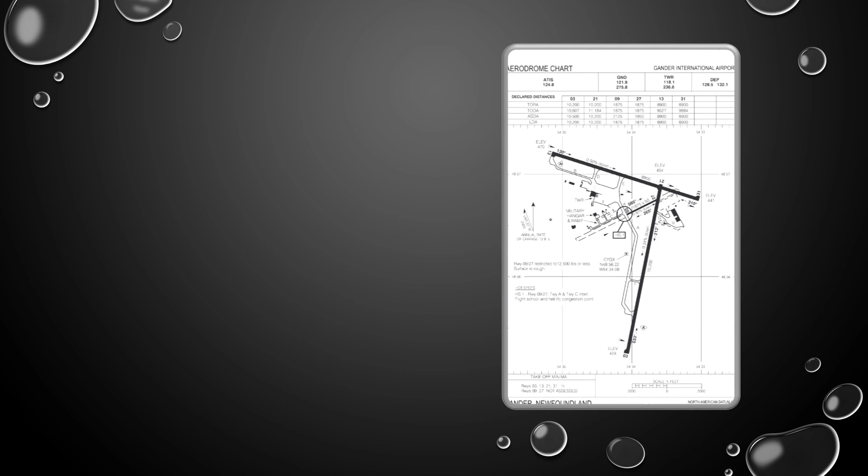Now here's a diagram of Gander International Airport. But what exactly happened in Gander? They had a successful refueling, then they taxied via Delta, runway 13 to runway 21. Runway 21 is 10,200 feet long and has a downslope gradient of about 0.34%, which should have aided them in their takeoff roll. About 51 seconds after brake release, the pilot rotated at 167 knots.

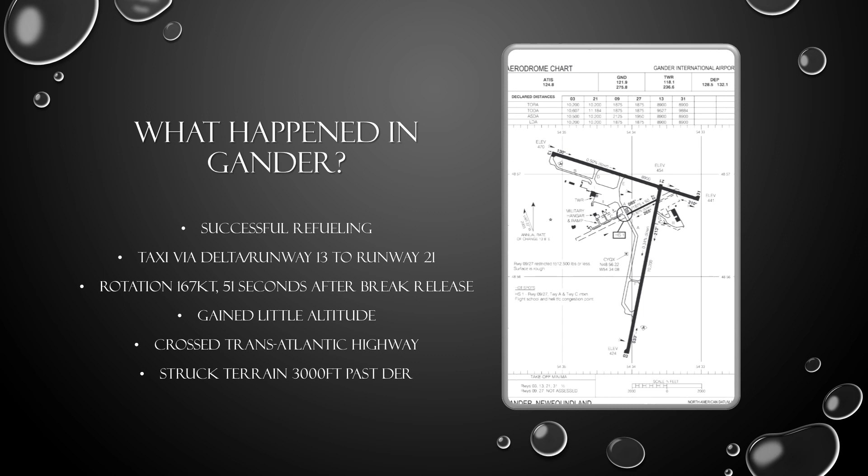So why did this happen? The investigation was done by the Canadian Aviation Safety Board, or the CASB. According to the CASB, ice contamination on the leading edge and upper surface of the wings was the leading cause of the accident. This is well explained by the time of year and the geographical location of Gander. There's plenty of water for moisture, and the cold temperatures are due to the location and the time of year. Also, human error plays a significant role in most aviation accidents.

So how does ice contamination affect a plane's ability to fly? When the wing of an aircraft experiences an accumulation of supercooled water droplets, it changes the surface of the wing, or the wing camber. This dramatically increases the drag and the weight of the aircraft, which in turn reduces lift, making an aircraft moving at the rotating minimum stall at the end of the runway. And as you can see here, an accumulation of ice on both the wings and the body of the aircraft increases the weight and increases the drag. Therefore, you need more lift and more thrust just to keep the plane in the air.

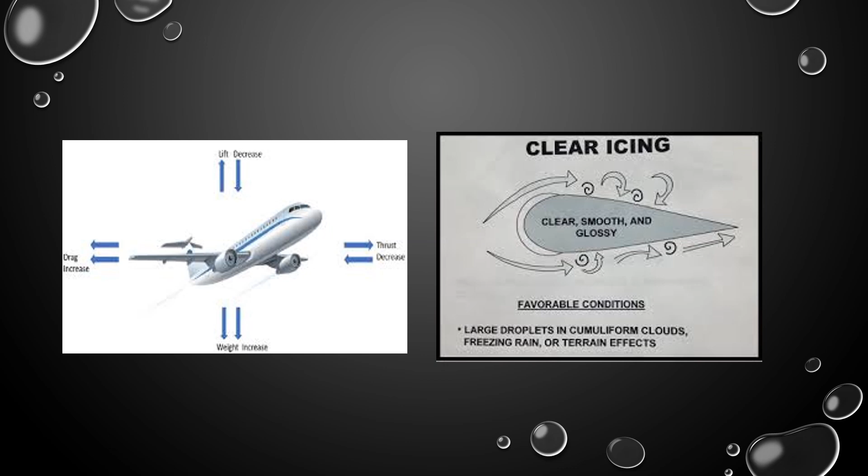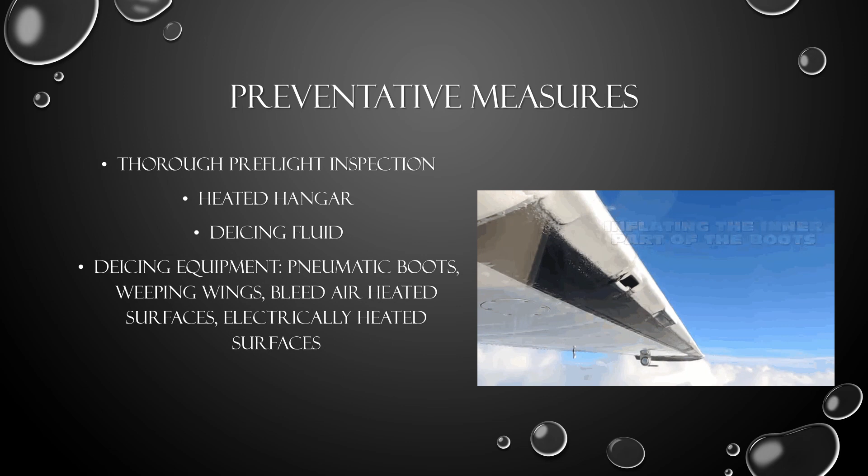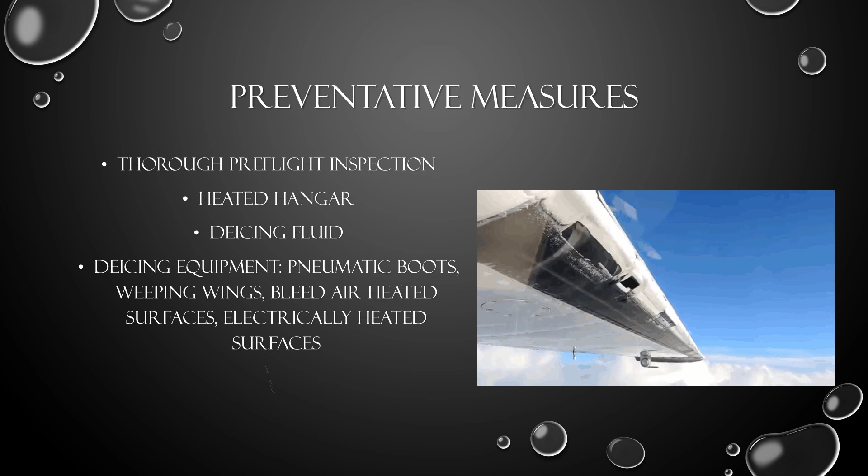Preventative measures. A thorough pre-flight inspection is the first and primary protection against icing hazards. Not only are we looking for structural hazards that can cause in-flight failure, but also an accumulation of frost or ice. Keeping your plane in a heated hangar protects it from precipitation and will melt any ice that may have formed. De-icing fluid and other equipment such as pneumatic boots, weeping wings, bleed air heated surfaces, or electrically heated surfaces also help remove any accumulation of condensation particles. If all else fails, the pilot in command has the right to deem the conditions unsafe and delay the flight.

Reason's Swiss cheese model. This is a model of accident causation proposed by James Reason. It stated that most accidents can be traced to one or more levels of failure: organizational influences, unsafe supervision, preconditions for unsafe acts, and the unsafe acts themselves. The slices of cheese represent an organization's defenses against failure as a series of barriers. The holes in the cheese represent individual weaknesses in parts of the defense system. When all of the holes in the cheese align correctly, this permits a trajectory of accident opportunity, which may lead to an accident.

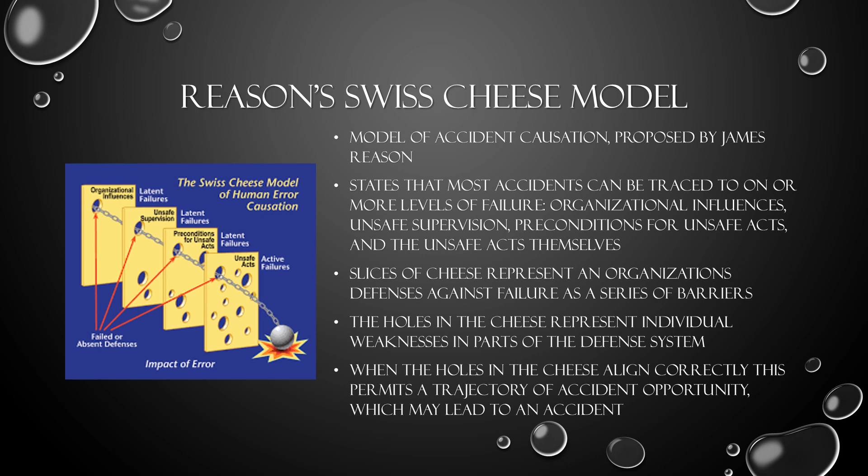Now let's apply the Swiss cheese model to Flight 1285 by breaking down our 4 slices of cheese. 1. Organizational influences. The pilots may have not had the proper knowledge on the hazards of icing conditions. Also, poor flight planning with respect to the weather forecast contributed. 2. Unsafe supervision. It was noted during the investigation that the plane was not de-iced prior to takeoff. The flight engineer performed a pre-flight inspection and deemed it safe.

3. Preconditions for unsafe acts. Precipitation conditions were favorable for the formation of ice during the approach to Gander. During refueling, there was a continued exposure to freezing precipitation. 4. Unsafe act. The flight was still cleared for takeoff, even though there was a high safety risk. Now, looking back at our preventative measures, the safety risk could have been lowered significantly with a more thorough pre-flight inspection, implementation of de-icing equipment, or just simply leaving the plane in a heated hangar.

A personal interview was conducted with aviation professional and aeronautics professor Deborah Henneberry. What do you think are some major risks in aviation today? She said fatigue continues to be a leading threat to aviation safety. A newer concern has been the deterioration of hand flying skills due to the amount of time the airplane is flown via automation. In the past, pilot error was the leading cause of accidents.